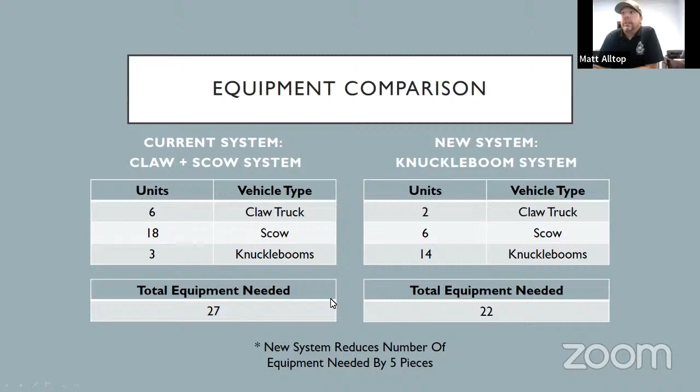So for current equipment, we have 27 pieces of equipment currently, and moving to the new system we would have 22 pieces. So we would reduce the number of vehicles by 5 once we get this up and running.

Here's our current claw and scow system: estimated annual equipment cost is about $734,000 a year. Maintenance is about $262,000 a year, and our estimated fuel cost is $252,000 a year.

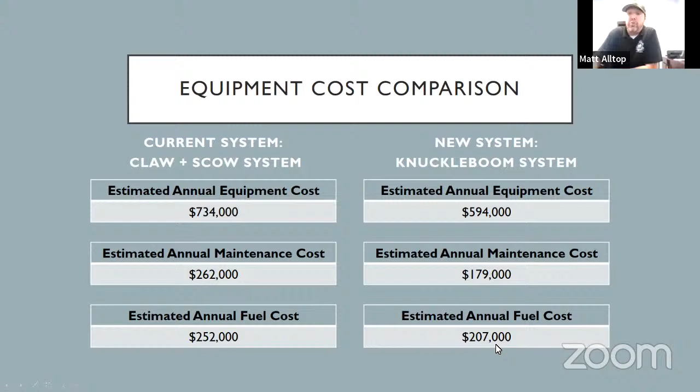Switching to the knuckle boom and reducing some of that equipment reduces our annual equipment costs, maintenance, and fuel costs by removing those vehicles off the road.

Current system, we collect 234,000 cubic yards of debris, which is what we're capable of collecting right now. By switching to the knuckle booms, we'd be able to increase that by 41,600 cubic yards and still have a savings attached to that.

Our current system requires 27 people, and that's without backup drivers. The new system would require 22 employees.

You can see we would not be laying anybody off. Nobody would lose their job. It would just be basically closing out vacant positions that we're having trouble hiring for, so there wouldn't be any layoff scenarios or anything like that.

Our estimated current labor cost is about $1.3 million, and that would go down to about $1.1 million.

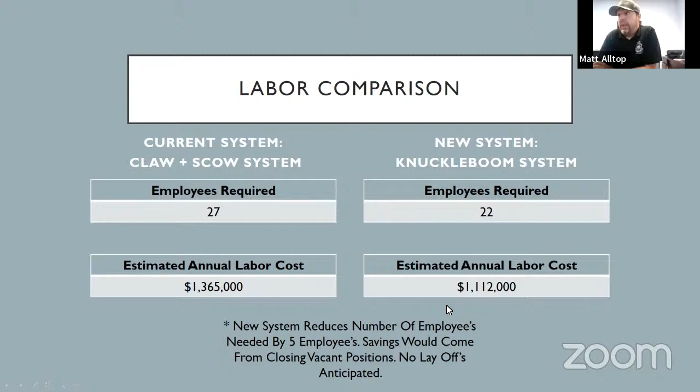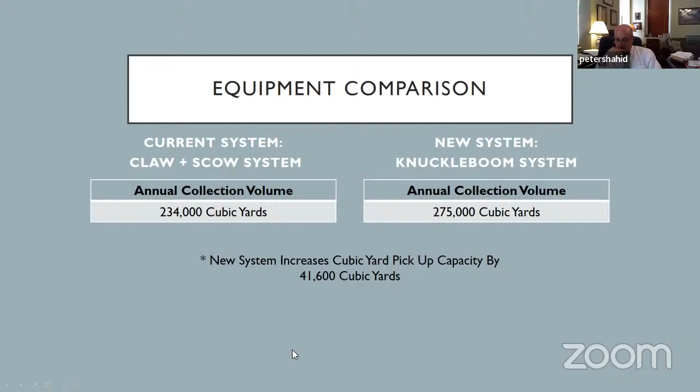And then here is our estimated savings from our proposed new system compared to our current system. So we would save on average an estimated $520,000 a year by switching to a more knuckle-based type program.

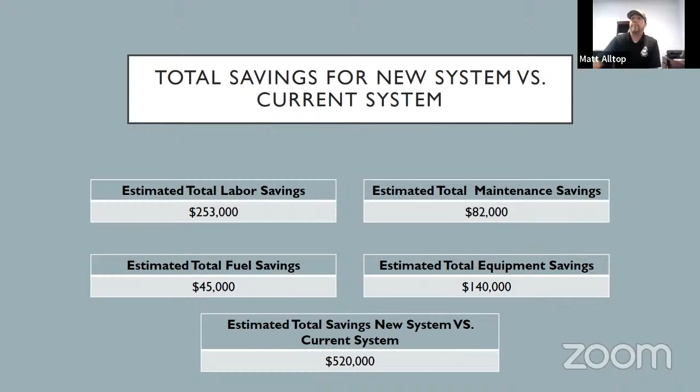So that looks like a $500,000 savings, plus you have less downtime as well. Yes, so there are some added benefits with moving to a more knuckle boom based system.

Hurricane cleanup would be improved because there would be a significant amount of vehicles out there collecting debris instead of just the 6 claws - we'd have the 14 knuckle booms out there collecting. The idle time right now, if the scows have to leave the claws and go dump, that claw sits there and waits for those scows to come back to route before they can continue to load. So the downtime, the idle time, and hurricane cleanup would all be improved by switching to this model.

Does any member of the committee have a question for Matt?

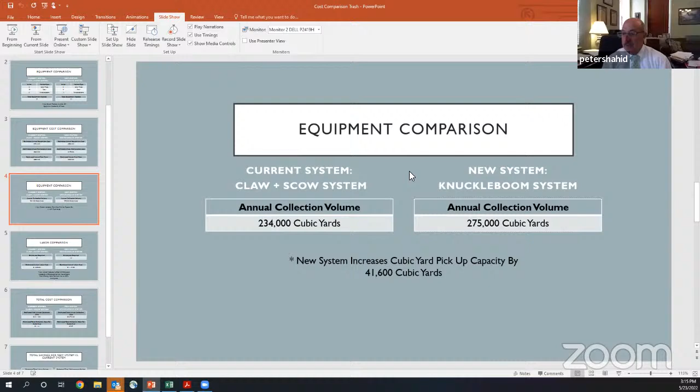Mr. Chairman, it's not a question, I just want to make sure everybody's clear that this is not for garbage. This is just for trash and debris, correct Matt? That's correct, that's just for yard debris and bulk. So when people are trimming down their trees and hauling them off to the sidewalk, or throwing away an old dresser, this is what will be used to collect these items.

That's correct, yes. And we have already done a study on this with the knuckle booms we have to make sure this was a viable option.

And we can run 3 knuckle booms on a route and get the route completed in the same amount of time as what we're doing now.

Now Matt, will this be used throughout the whole city, or will our private contractors not be using the system? No, this is just our stuff, just ours. But this will not be going over to Daniel Island or Outer West Ashley, correct? That's correct, this is just the routes we service with city crews. However, we do send a knuckle boom over to Daniel Island when our contractor requests help.

Yes sir, Mr. Mayor. What do our contractors use? Our contractors usually use - Trident uses garbage trucks for leaves, and then for the big stuff they have a knuckle boom that comes through and collects. Capital Waste uses a garbage truck - they come in, pick up all garbage, go dump, and then come back and pick up yard waste and bulk.

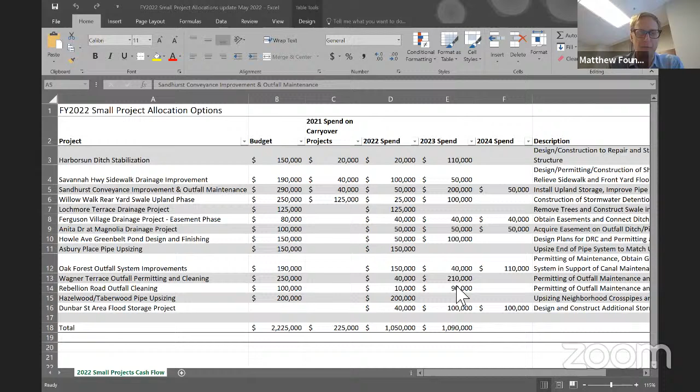This takes it down to 1,050,000 and 1,090,000, which are probably approachable based on potentially having a little bit of slip even from these numbers with the way scheduling tends to be going. But if anyone has any questions, I can talk through those, or if anyone needs reminders of which projects, I'm happy to talk about that as well.

So Matt, just for clarification, and you said this, it's pretty obvious, but looking at this spreadsheet, items 3, 4, 5, and 6 are projects in progress. 3, 4, 5, and 6? Yes, that's correct, Councilman.

So those are projects that we had allocated some money in 2021 with the understanding that we would need additional money in 2022. So those are projects we're already working on, correct? And as you said earlier, that would carry over into 2022, this current year ending in 2023, and one of them into 2024, so those monies are already kind of dog-eared, for lack of a better way of saying.

The projects that are in progress carry over 2 more, maybe 3 more years until they're completed. You're correct, there are projects that have sunk cost already, so generally those are projects that are continued for allocation. But of course that's the option for the committee and council on how they want to allocate.

Right, it just doesn't make sense to stop in midstream. If we've got something going, we'll want to finish it out. I generally agree, yes. Okay.

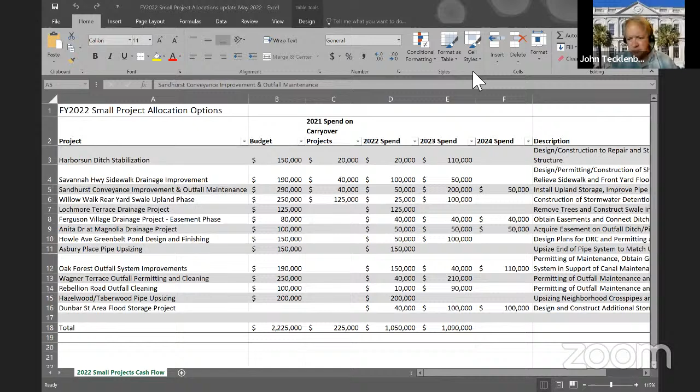I agree wholeheartedly. I see at least two projects in my district either in progress or starting to be in progress. So Matt, thank you for what we've accomplished there. Any further discussion, comments? All those in favor? Aye. Aye. Aye. Any opposed? Ayes have it. All right, that was easy.

And Matt, I know I got a copy of this before. Have you circulated this among the rest of our council? I have not circulated the updated version, Councilman. We didn't change any of the projects on the list, we just shifted the cash flow component. So I'll send the updated cash flow approach out as well.

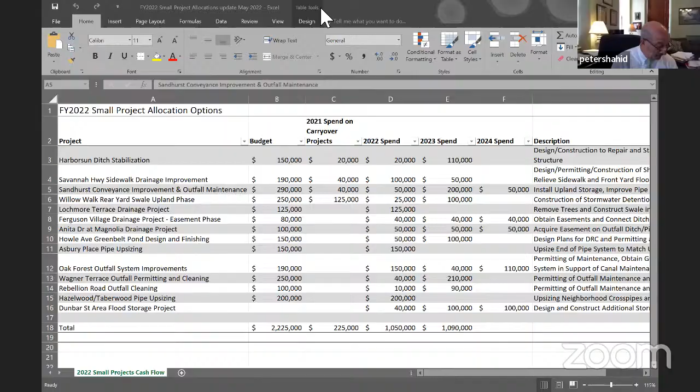Okay, thanks, very good. Moving on to the Spring Fishburne update? Yes, let me share that presentation. All right, let's go into presentation mode.

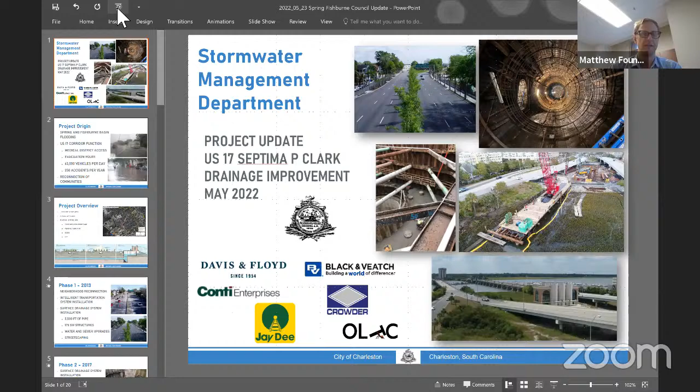Mr. Chairman, I'm bringing an update that includes all of the phases of the project because we have some new council members. I'll try to move relatively quickly through the completed portions that most council members are more familiar with, but feel free to interject with questions. This is a brief update on where we stand and in preparation for what we'll be doing contractually the rest of the calendar year.

So again, front cover is just some highlighted photos as well as some of the partners who've worked with us on the project from engineering and construction.

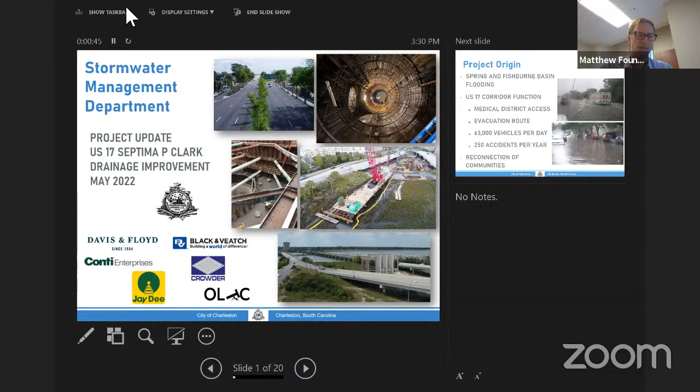Just a reminder, it's called the Spring Fishburne Project colloquially because it's the spring basin and the Fishburne Basin from the 1984 drainage study, centered along the US 17 corridor, the Septima Clark corridor. It's a major point for medical district access and one of the city's primary evacuation routes. The road historically has seen over 63,000 vehicles per day traveling along it, and that number has been increasing every year, so we'll see what the new DOT numbers come out at. It's a critical corridor for the city.

Part of the origin of the project was also demonstrating that there were more than 250 accidents per year on the road, many of which were rear endings due to flooding situations from sudden stops or issues. That brought about some DOT support for the project. There's also federal money, which we'll mention, originated to try to reconnect the communities that were separated by the original crosstown portion of the project, which we've probably heard about in pretty good detail.

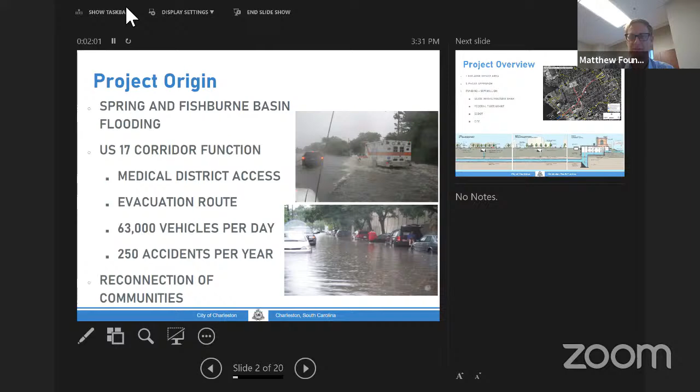Some of the council members do a good job of bringing up and discussing the really negative societal impacts that US 17 had from separating different levels of income across the peninsula.

So again, just a quick overview map. The yellow is the impact areas. Not all of that is directly served by the project, but through this project and a combination of sub-projects, the areas that will see some drainage improvement are about 500 acres, a significant portion of the peninsula. I think about half of that is direct service, if I were to pull the exact numbers.

Five phases of the project, about $197 to $198 million of funding. The majority of that coming from the State Infrastructure Bank. We did, as I mentioned, receive a federal TIGER grant at the beginning of the project for trying to reknit some of the communities and add pedestrian access. SCDOT contributed from the traffic perspective with an early grant in the project, and then, of course, the city, through the King Street Gateway TIF.

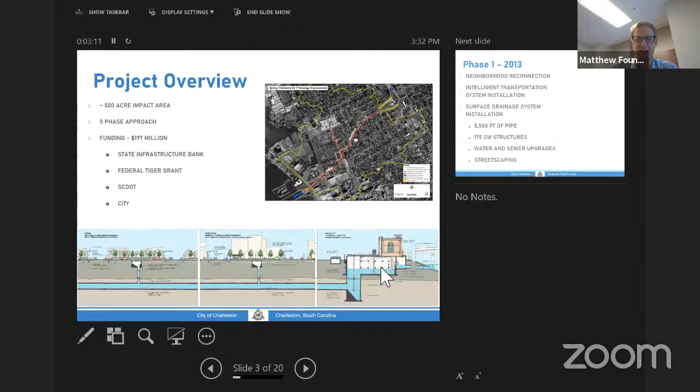Just a quick cross-sectional view of what it looks like. Basically, a very large deep tunnel under the city is fed by surface drop shafts that connect into the existing collection systems on the surface streets, giving that water somewhere to drain as it flows out into the wet well, and then can flow either by gravity or through the future pump station out into the river.

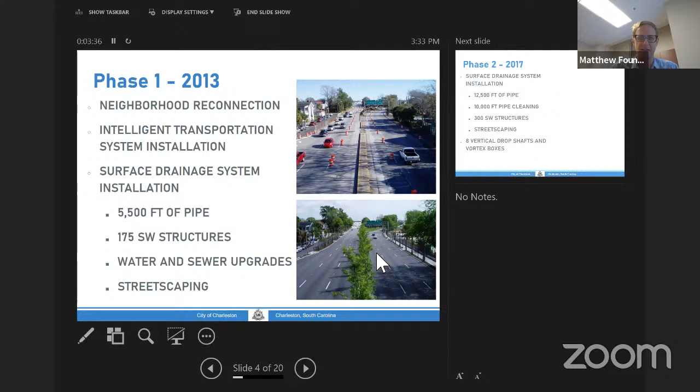Phase 1 was the neighborhood reconnection work, which basically installed intelligent transportation systems, traffic lights that focus on how traffic is moving in the area. We also did a bunch of surface drainage work and streetscaping. You can see the before and after pictures of what we're used to seeing nowadays on the roadway.

Phase 2 is 2017. This was the rest of the surface drainage, which was separated into two sections because of the TIGER grant, since you have to work on the TIGER grant elements before you can work on the other elements of the project. This also included adding the 8 vertical shafts down to where the eventual tunnel will hit.

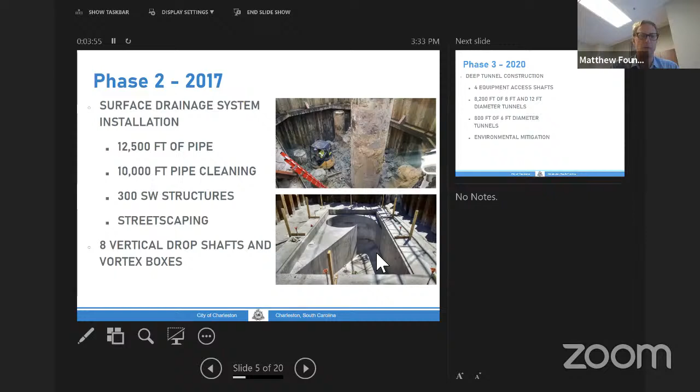Phase 3 was completed in 2020. This was our deep tunnel construction, including 4 access shafts, really large shafts to raise and lower equipment down into the tunnels. Almost 2 miles, a little bit short of 2 miles, of 8 and 12 foot diameter tunnels, the large tunnels, and then a series of smaller adits, or 6 foot diameter tunnels, that tie into those large tunnels to serve different areas, as well as the environmental mitigation work we had to accomplish in order to do the marsh disturbances necessary for phase 4.

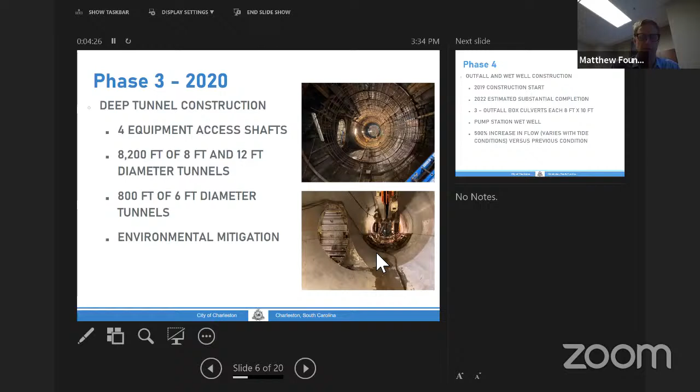Phase 4 — I have more slides for this one. This is the outfall and wet well construction we're currently working on between the two bridges to West Ashley. We started this construction about 2019, and our estimated substantial completion is still towards the end of 2022.

This phase involves installing 3 very large outfall box culverts out into the river. That was what we call the trestle, sort of a mini bridge you used to be able to see going out into the river, which is now being removed. Those box culverts are each 8 foot by 10 foot, so they're very, very large culverts going out to the river to move this water out without creating a velocity high enough to negatively impact the bridges — that's basically why you do it this way.

We also have the pump station wet well, which will basically hold the water for the pumps to cycle without damaging them. The conclusion of this project will result in about a 500% increase in the flow rates from the pre-existing condition — that's just the gravity component. It does vary a little depending on tide. Obviously at lower tides you're going to get higher flow rates, and at higher tides you'll get lower flow rates as the tide pushes back against the water.

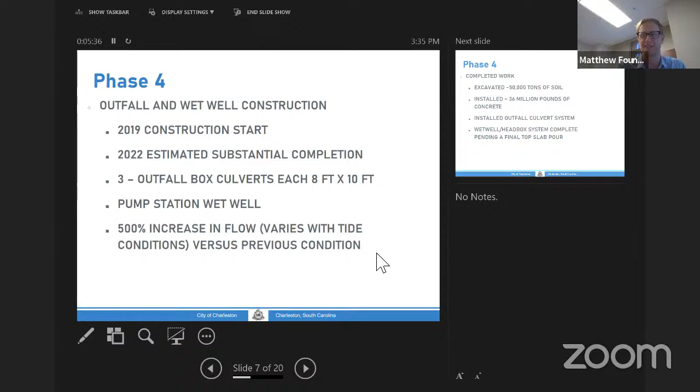To date, we've excavated just under 50,000 tons of soil from the project, which is what all the shoring and support was for between the bridges there. Obviously, you don't want your bridges to collapse while you're excavating a very large hole between them. We'll come back and install about 36 million pounds of concrete. For perspective, it's a big project.

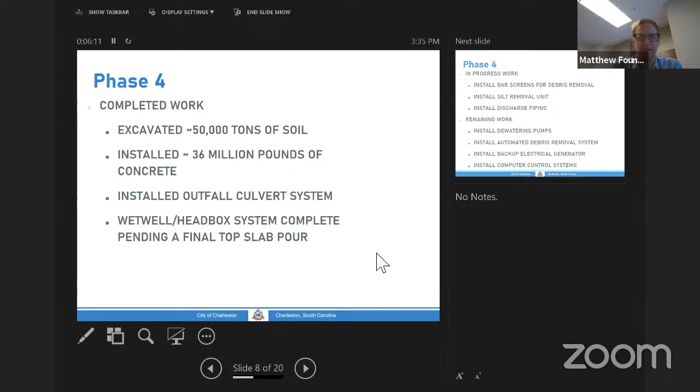Put in that outfall culvert system that we talked about, installed the wet well and the head box, which I can talk about in more detail if anyone wants, but basically the engineered system to make the pumps be able to work and feed into that outfall. We're currently working on installing bar screens for debris removal, putting in the silt removal unit, which will help with water quality going out into the river, and putting together the discharge piping for the dewatering pumps that will go in.

Once that's complete, we'll come back and install those actual dewatering pumps, put in the automated components of the debris system, put in our backup electrical generator. It's not the backup for the pumps. The pumps are actually run off of diesel engines. They don't have an electrical backup. This is the backup for the electrical systems in the unit, so everything else can keep working. And then the computer control systems for the project come in phase 4.

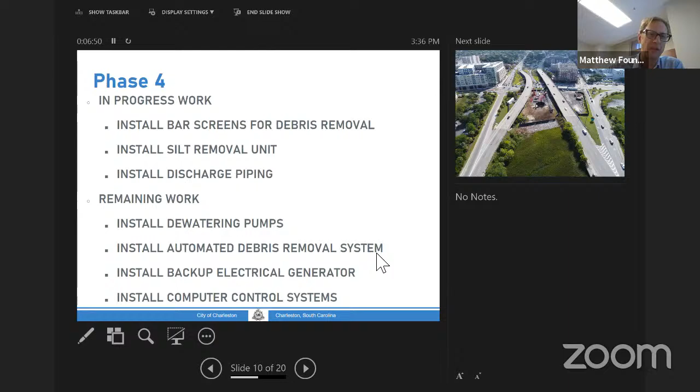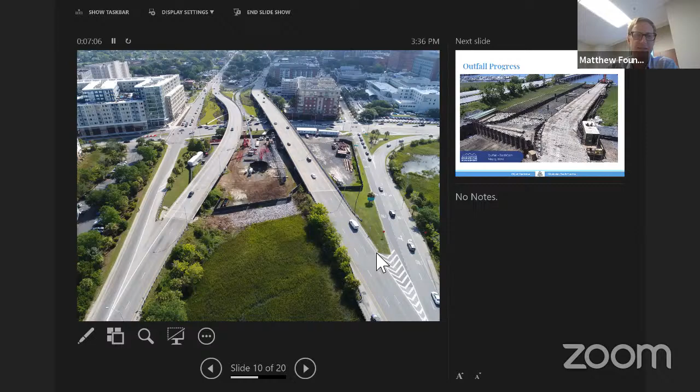Just as a reminder, something that's a little more exciting than bullet points, this was the existing condition when phase 4 was getting going. You can see the access shaft for the tunnel that had happened in phase 3, sitting in the middle of the project site. This should be a GIF that will hopefully run.

Yep, there it goes. So you can see here the excavation work as we installed basically this excavation support, slowly dug out our way through all of the wet well and outfall. Came back, installed all the piles. Here you can see the formwork and the concrete going in.

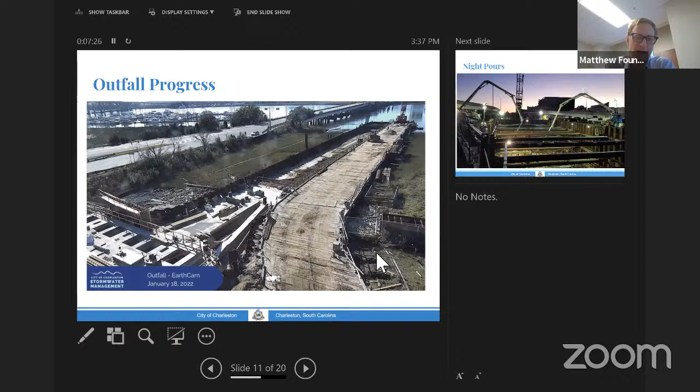Here the box culverts have been installed, poured in place. Now they're being backfilled. And then the current project is actually removing, in this final picture, the trestle and the excavation support.

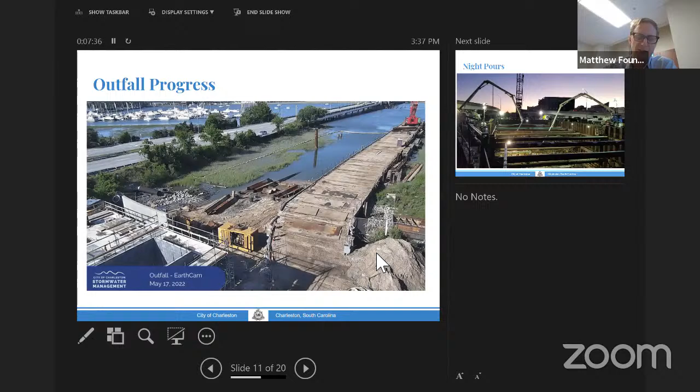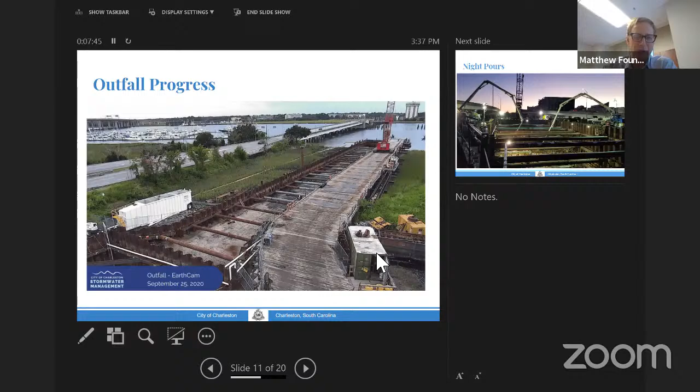And I'll just keep replaying again. If anyone wants to see it in more detail, I can certainly provide it to you, or we can let it run through multiple times. It was an interesting process to watch. This is a few years worth of work occurring in just a few minutes, but it was a very long civil engineering project.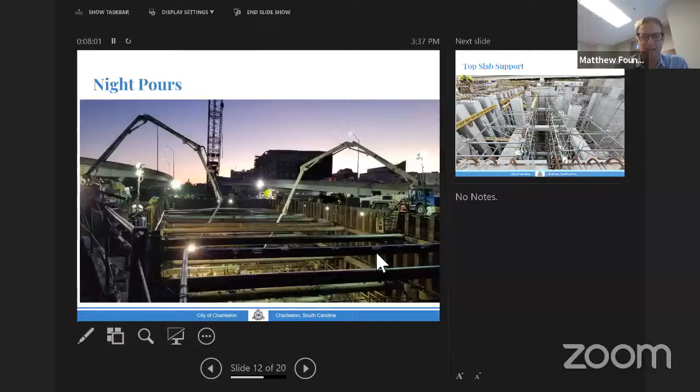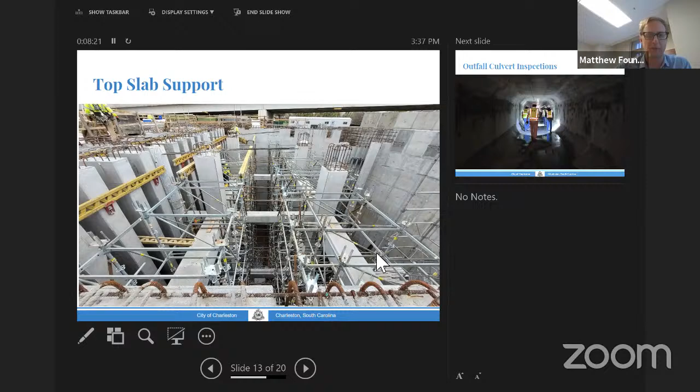We've come back and poured quite a bit of concrete, most of it at night due to the size of the pours. This is a picture just of the top slab support. Basically, once the base concrete's gone in, what we've done is support and stabilize the top slabs, which are the large slabs of structural concrete that sit on top of the wet well and allow everything to sit up on the deck - the pump engines, the control structure, and eventually the building.

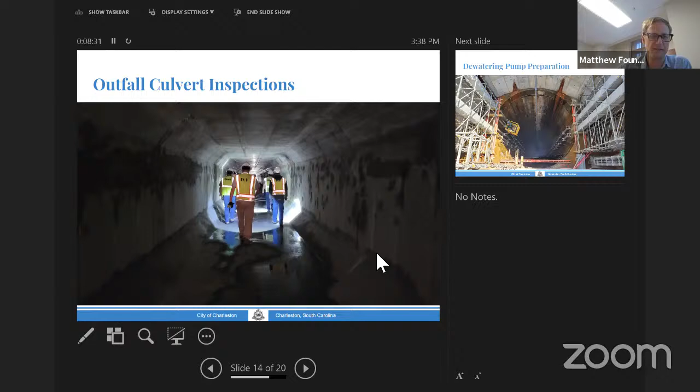Again, culverts are completed, our inspections show everything is in good condition. This is a view looking down into the tunnel again from the surface. How deep is that, Matt? The total depth all the way down is right around 120 to 130 feet. The wet well itself is not that deep - that's just the surface down to the bottom of the tunnel. The wet well, I have to double check, I think it's roughly 40 feet deep.

So this is the dewatering pumps that are going in to be able to dewater the tunnels, in addition to the larger pumps that will sit in the wet well itself, which don't dewater the tunnels, they just cycle through the wet well. You can see scale-wise, the gentleman in the box working. He looks like a gnat. Yeah, it's a big construction site.

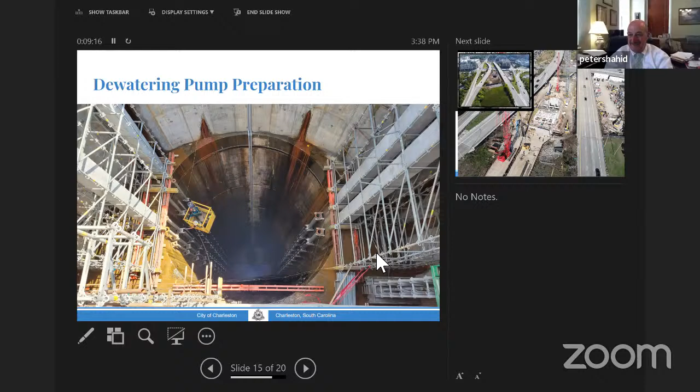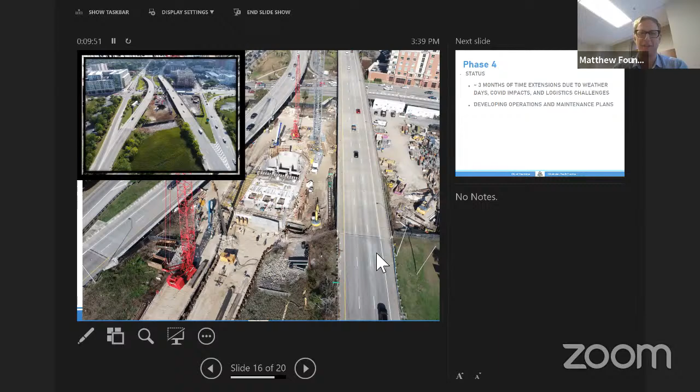Then just a quick before and after comparison. The upper left is obviously that before picture we saw earlier. The right picture is not exactly current, but it's close to current, an aerial view showing all that concrete that's been installed. The outfall boxes have been installed, and this is where they're starting to backfill on top of the culverts. They'll remove the trestle after this, finishing up the top slab pours. We're rapidly trying to acquire all of the cranes in Charleston, feels like sometimes, as we have so many different tasks going on the project site, but a lot is getting done.

Just a quick status update on the project. Again, we started early 2019. We've been running pretty well - the contractor's been doing some really good work in the last 18 months or so. We are about 3 months behind the original substantial completion date due to a combination of events, mostly weather days, but also some impacts from, thinking all the way back to 2020, the impacts of COVID, and then some of the more recent logistics challenges.

We're currently working on developing some operations and maintenance plans. So generally, again, a successful project that's going well, but we will have some extension contracts probably to bring forward to council at the next session.

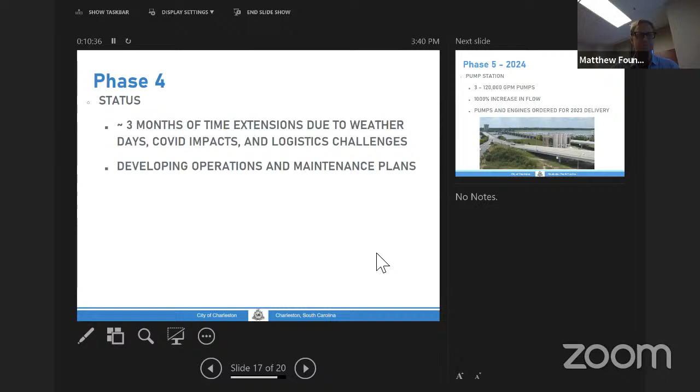Phase 5, we already ordered the 3 120,000 gallon per minute pumps from Xylem. That'll result in a 1,000% increase in flow versus the 500% we saw at the end of phase 4. That's the increase above the original existing condition, and it varies depending on tide condition—that's why there are such round numbers, as it gets much more complex depending on the tide cycle. But roughly 10 times as much flow as existing conditions, about 360,000 gallons per minute. So it's a pretty good amount of water we're moving out into the river there.

The pumps and engines are currently scheduled for late 2023 delivery. It's good that we got those ordered when we did, as we were able to lock in pricing and materials.

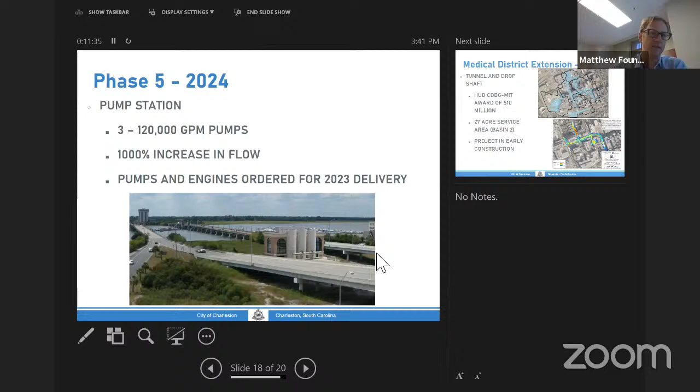Then lastly, we've mentioned this one a little bit at council recently—the medical district extension, of course, ties into this project. That has already started construction, though we're still in the very early stages, and we should be complete roughly mid to late next year.

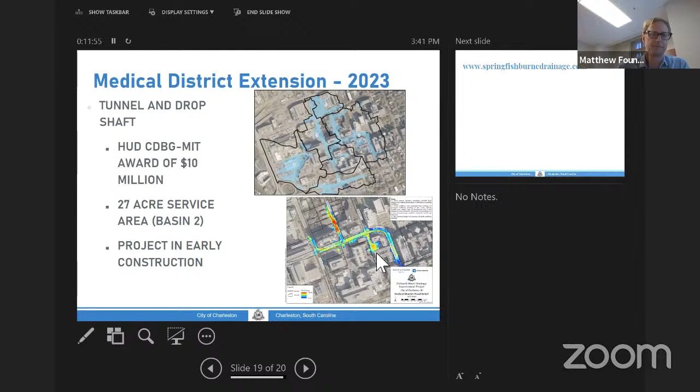That was a speed lesson in this massive project that's spanned almost 15 years. From the original design, the original concepts were a little over 20 years now, but construction-wise we're sitting just around 10, a little over 10 years. Wow, it's really quite impressive. Those of us who took a tour several years ago over by the park, getting into those shafts and looking at all that, it was really quite impressive.

Councilmember Appel: Thank you, Mr. Chairman. First off, Matt, whenever there's an opportunity for us to get back on site when it's safe to do so—I know it's tempting to put a bunch of municipal elected officials in a 130-foot deep shaft and maybe close the lid on us, but I think it'd be interesting to check it out. I wasn't on council when the other group got to go, so I think it would be interesting.

My question, though, is how unique is this project in the world of stormwater engineering and municipal work—first in the Southeast, and maybe on the East Coast? Is this like a revolutionary type of project? I'm just trying to understand how to frame this in the context of the world, because from my vantage point, this is mighty, mighty impressive.